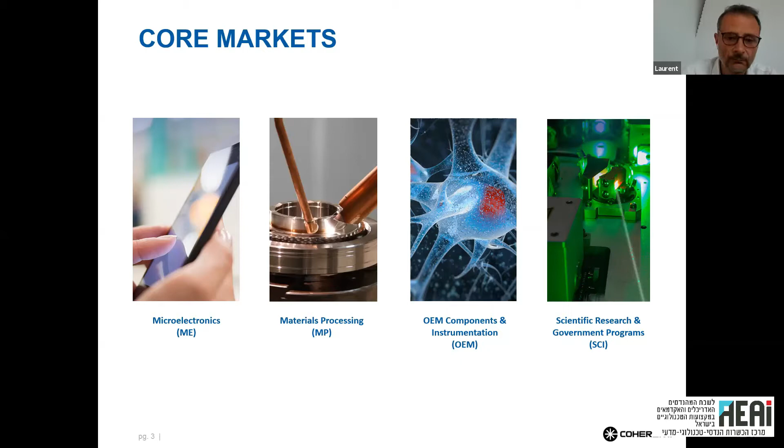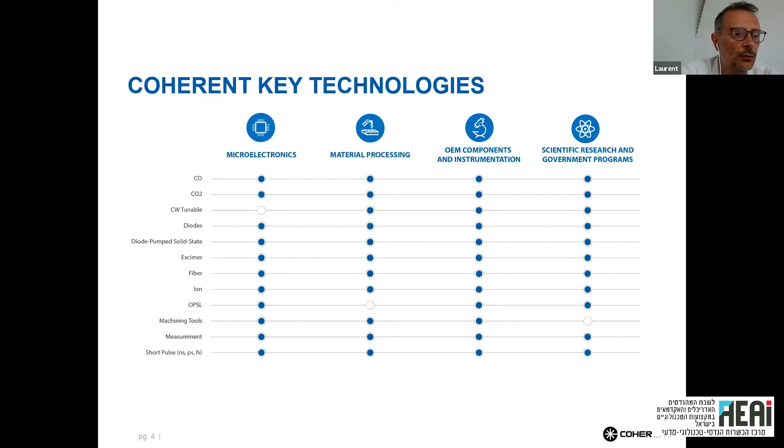So just to give you an idea about all the lasers we are able to supply, it's quite huge, a very wide laser portfolio, from very standard lasers to specific products. We have more or less all the wavelengths, levels of power, pulse widths, and beam profiles you can expect from the laser business. It's also important that we provide not only lasers but systems, meaning machines, and also subsystems. So if you want to build your own machine, we are able to provide you the laser plus some accessories around it.

Our global organization is more or less all around the world, but in every country you will find the same structure: salespeople and service people. We are in the automotive industry, for example, so we need to provide support to all these big groups. In order to have a good response time, we always have service guys ready to go to each customer to repair lasers in case of problems. In Israel, for example, we have a team of more or less 10 people with sales and service.

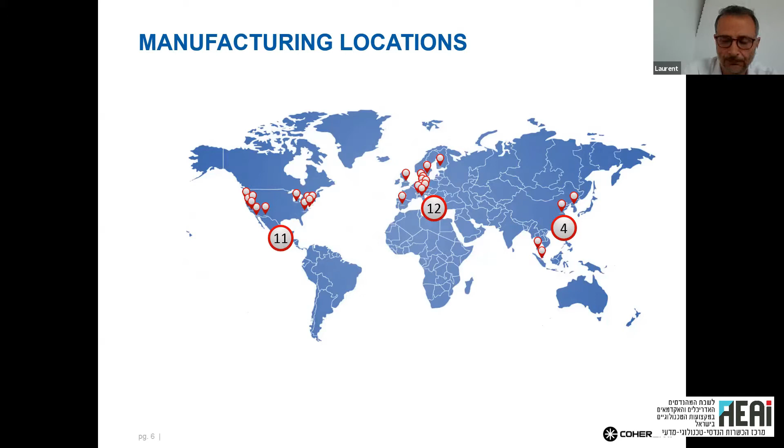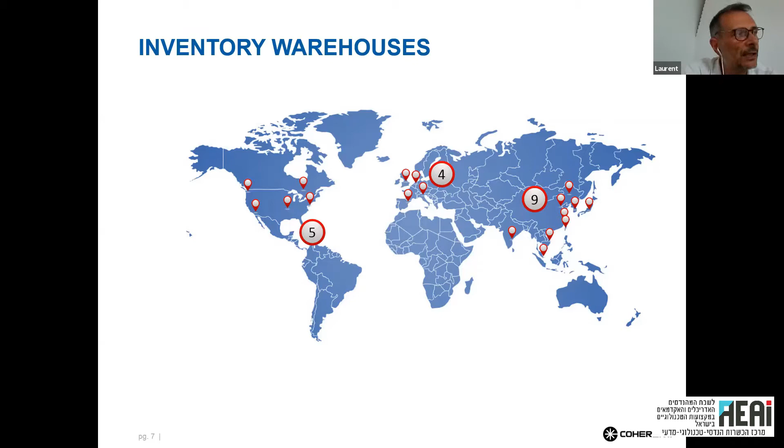We produce in 27 locations, mainly in America and Europe, and a little bit in Asia. In order to have a quick response time for our customers, we also have depot repair. This means we have some lasers ready to be used or exchanged, and we also have spare parts. So if your laser is in trouble, we are able to call on these depot repairs and get the parts in a very short time.

To sell our lasers, we need to help our customers and advise them about what we can do with our laser. For this, we have application centers and laboratories in America, Europe, and Asia with all the lasers, and we are able to support you regarding your assembly. We are able to advise you on what to do and give you the best configuration.

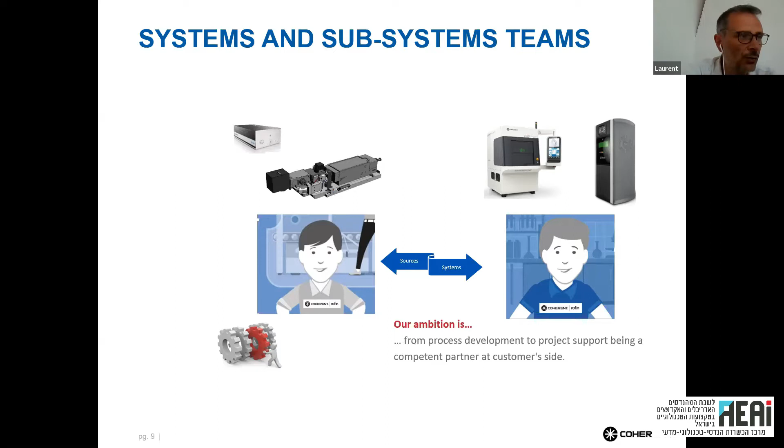As I said, if you look on the right side, we are able to provide some machines, from simple machines to 3D printing machines, for example. But we are also able to focus only on the laser, from nanosecond laser to femto laser, for example, and also high power fiber laser for the automotive industry, for example.

So now, this is the main topic of this discussion. I would like to give you some information about this new product, the SmartWeld+. It's an innovative head, and with this presentation, I would like to show you how it works.

Coming back a little bit to the basics, I'll give you some inputs about why we created this SmartWeld+, around all the knowledge of our engineers. And of course, and it's probably the best for you, I would like to give you some examples about what you can do with this head.

If we go back a little bit to the theory of laser welding, around the process you have a lot of parameters, and all of these parameters can be very different from one assembly to another. As you have seen in the first slides, we have a very huge laser portfolio. So it's difficult to say, okay, for this application or for this type of assembly, we need to use this laser. We need to check a little bit more and understand what could be the best configuration.

As I said, we have lasers with different kinds of wavelengths, so it could be infrared, but it could also be green, or sometimes UV laser. We can work in CW mode, continuous wave, or we can work also in pulse mode. The beam profile of a laser is also very important. So all of these parameters are of course important, but the idea is not to adapt your parts to the laser. It's really the opposite, and this is how we work at Coherent. The idea is to have the possibility to adapt all our components to your product.

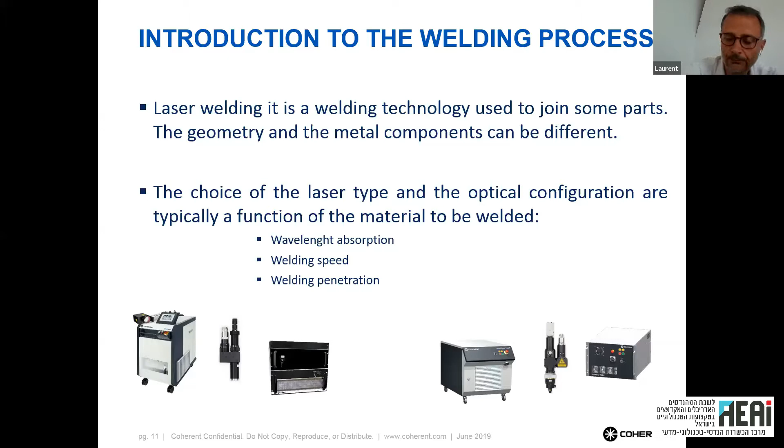If we look at the butt joint configuration, what you are looking for is the width of the weld. If you weld with very good conditions, very perfect, if you don't have any gap, of course it's not necessary to have a very wide seam.

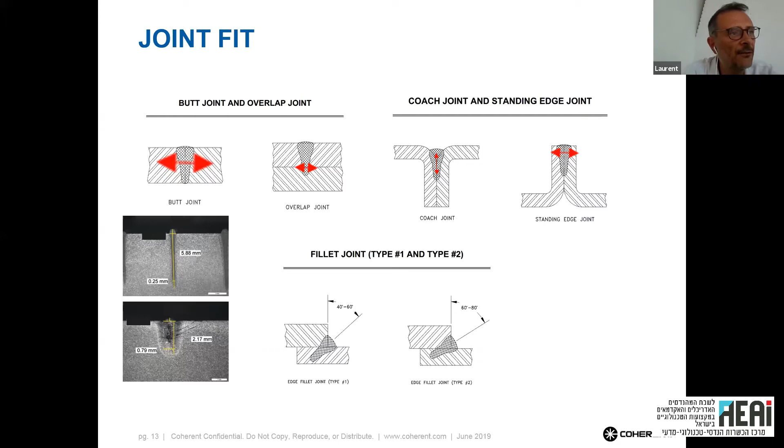If you have a very small spot size and a lot of power, it's easy to understand that the penetration will in any case be higher. If you have a big spot size with some power, of course you can imagine that the penetration will be lower, but the seam will be wider. But again, what is really important to understand is what is really necessary. If we go now to the right side for the edge joint configuration, it's the same.

Two edge joint, according to the spot size we put on the edge, we can create this ball - it could be very narrow or wider. This kind of pins are used today in the automotive industry for electrical engines, for example, two wires side by side, and the idea is to create the ball on top to do the link.

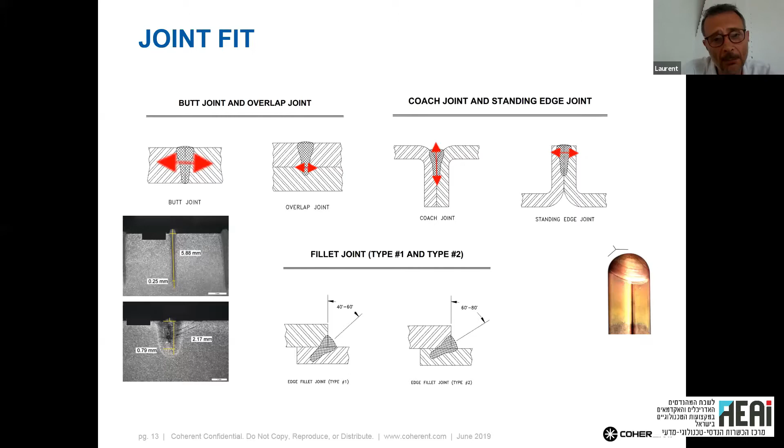Same for the coach joint, in this case the penetration will be important. We don't need to be really wide, but the penetration looks very important. All of these parameters, we can help you define what the size of the seam will be, but we need to define exactly what you need, and according to your set of specifications, we will adapt the beam to this weld.

Just to give a little more understanding about the spot size, I put some pictures on top - it's only a sketch, but very narrow weld, we can imagine that's a green focus beam for example, and the blue is the wider seam. In all of these pictures, the power is exactly the same, the speed is exactly the same, the focal length is exactly the same. The only difference is the spot size.

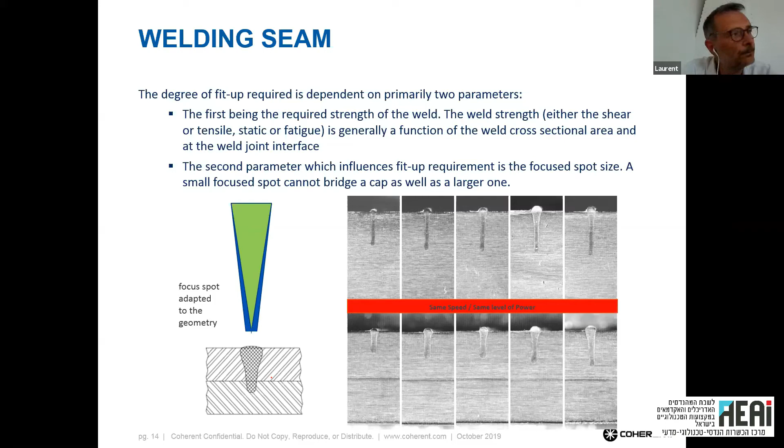So you can easily imagine that according to your project, according to the length at the interface you need, if we don't do the right configuration in terms of focus or spot size, it will not be possible to work in good condition when the part is welded. So the spot size is very important.

Of course, all of these small sketches are close to theory - it is theory. But unfortunately we usually have a mismatch between the theory and the reality. From real parts we can have some gap, we can have different kinds of materials, and we can also have some chamfers sometimes. So we need to compensate for all of this gap with, again, the spot size.

But it's not so easy, because if you increase the spot size too much, this will involve other problems. You will increase the molten material, and if you have too much molten material, you can get oxidation inside, you can create porosity. The heat affected zone will be higher because you put too much energy inside the part, so the heat will increase around the weld. So we really need to adapt and find a solution - just increasing the spot size will definitely not be enough.

Another thing to mention is when the spot is really too big, this generates a lot of splatter, and splatter is really a nightmare - small balls all around your parts. For medical parts, or for a specific area, it will be very difficult sometimes to clean the parts. So if we find a way to weld in good condition without just increasing the spot size, it will be very helpful.

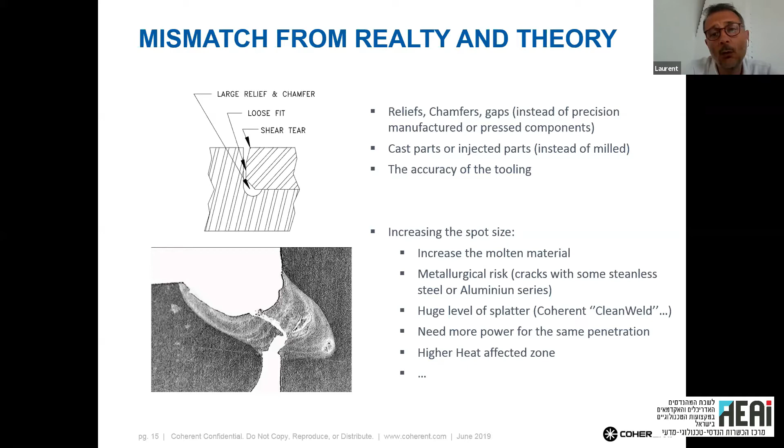And of course, this is what we try to do with the smart weld. We introduced this smart weld, but again, in terms of innovation, this head is really based on our knowledge - our knowledge from the past is a welding head, but with fixed optics, no scanner.

In a lot of configurations we are using scanners from different kinds of suppliers - we are not making our own scanner. But for this head, we decided a few years ago to mix a scanning head with a fixed optic.

And what is really important with a classic fixed welding head is the possibility to keep the beam quality. If you're able to keep the beam quality from the laser on your part, this will definitely help you weld in good condition and increase the quality of the weld. So this head is really a mixture between a classic head and a scanner.

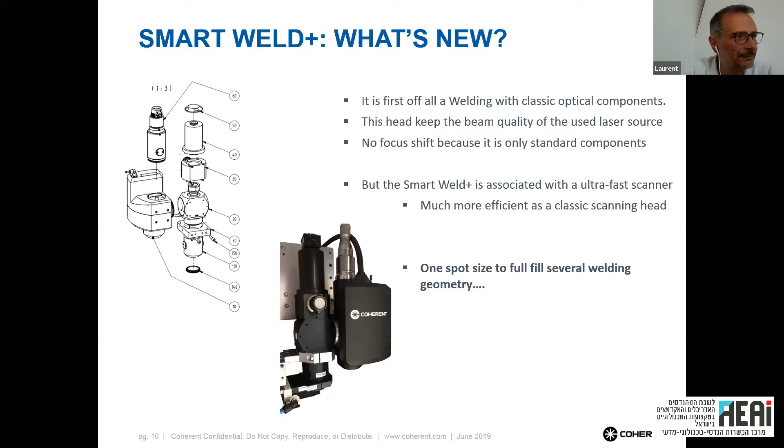Coming back again to the theory, just to give you some explanation about how it works. To focus a laser beam, we have a few possibilities.

It could be like on the left with a parabolic mirror. Honestly, it was mainly used in the past with CO2 laser. Today, we are using lenses. Lenses are probably 99% of what people are using today on industrial application.

The scanning head on our SmartWeld Plus is placed just on top of the lens, so the mirrors to move the beam are just on top of the lens. When I move my beam on top, this creates a very small deviation after the lens. It's not really big, not like a conventional scanning head with a big working field. Here it's really only a few millimeters, no more.

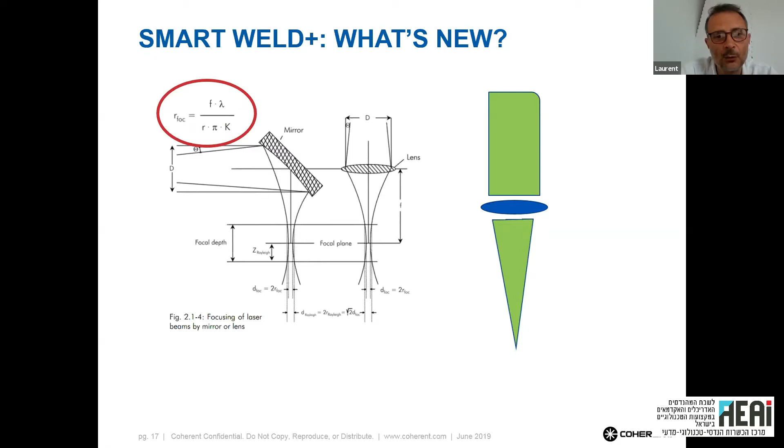And with this head, I would like to focus on this calculation. I don't want to do mathematics this afternoon, but just to give you an idea about why we made this head. If you look at this calculation, some parameters are completely fixed. The wavelength, for example, is fixed. The diameter of the lens, we try to have the maximum, so it's more or less fixed too. The focal length is also fixed. Pi, as far as I know, has been the same for a long time.

And the K factor—the K factor is probably the variable in this case, because the K factor is the beam quality. If you go through a lens or through mirrors, you decrease this K factor. This means that from the exit of a laser to your parts, if you have multiple mirrors, you will decrease this K factor. This K factor should always be between 0 and 1. If you are close to 1, the K factor is very good. If you decrease the K factor toward 0, you can easily understand by this calculation that the spot size will increase—the spot size will be bigger.

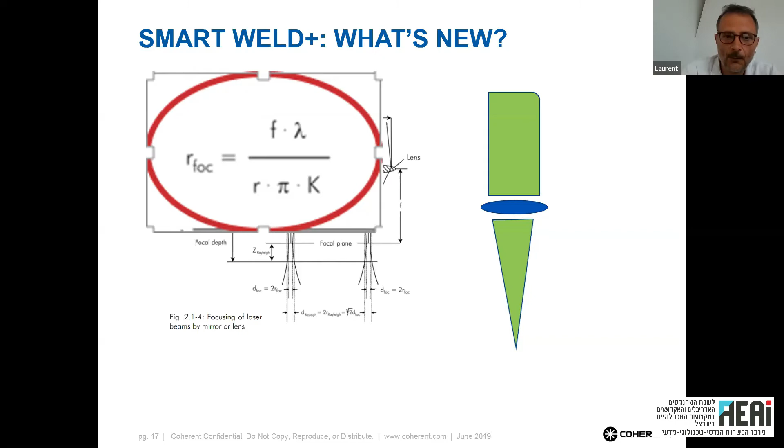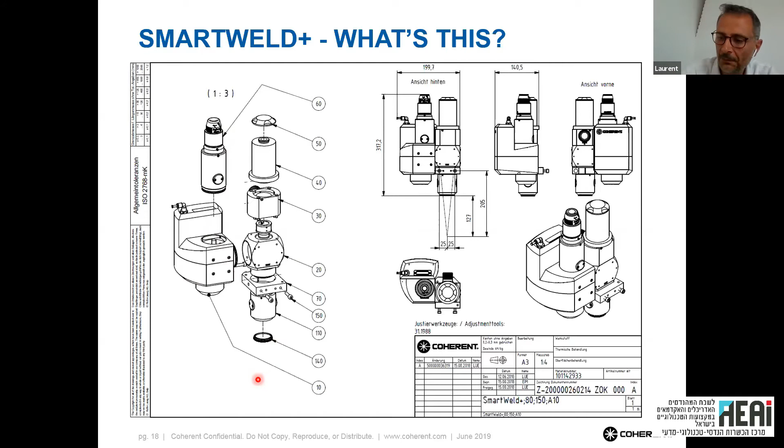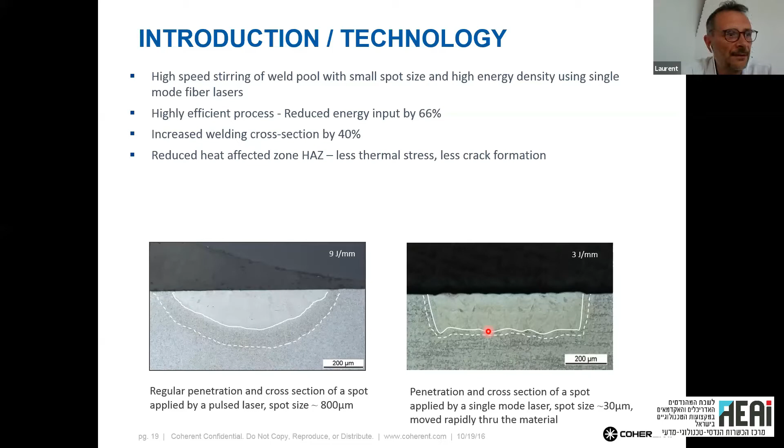The advantage of having a scanner inside the head is the possibility to create specific patterns. The idea is not to go from right to left, we also have the possibility to create some very specific shapes. And this definitely helps because all materials react differently. When you weld aluminum, for example, or copper, or stainless steel, sometimes it's better to have a very, very specific pattern.

In this case, we need a little bit of imagination. Today in the head, we have 15 patterns stored. We also have the possibility, according to the pattern, to follow the contour, for example. So if you have a cross, for example, or also this Mickey Mouse shape, it's not on the picture, it will be later.

You are also able to really track the seam and put the right orientation on the pattern in order to be always in the same position compared to the edge.

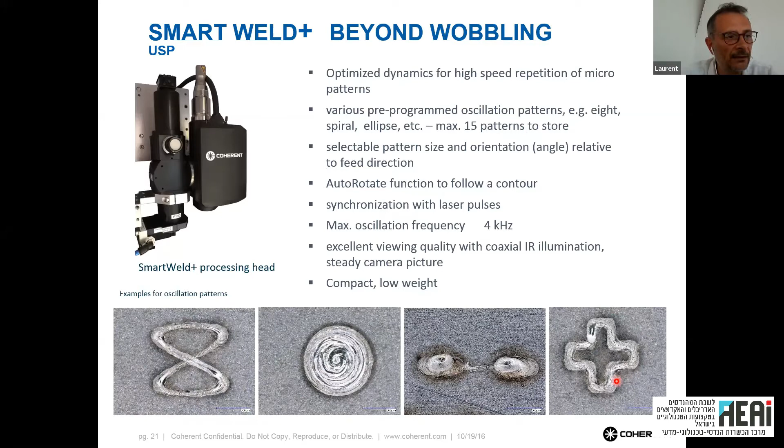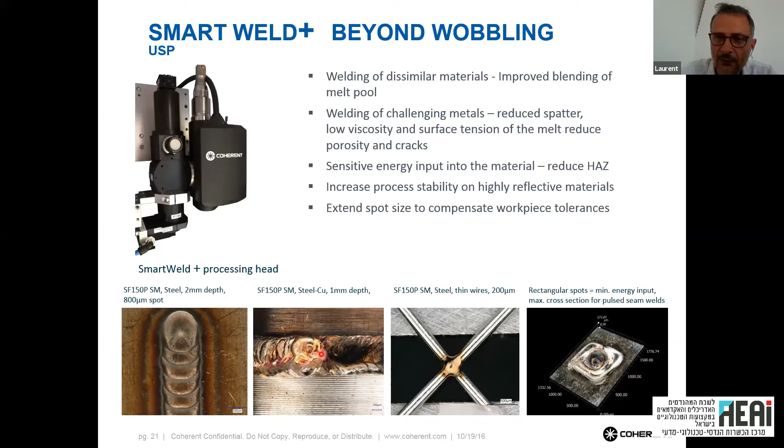So on the left, you have an idea about what we realize with the beam we saw in the last pictures. I have much more examples to show you just after, but what I'd like to show you here is the different patterns and how fast they run. Of course here it's in slow motion, but this is what you have. The beam is moving like this, and part of the welding head is also moving at the same time.

The spot size we see here is 30 micron, and we realize some specific shape. To give you an idea about what we're able to do, this pattern is used to weld some specific stainless steel with a coating on top. It could be zinc, for example, only a few microns of zinc. It's very helpful because these two circles in front of the big one help to vaporize the zinc, and you're really able to weld with this bigger ring. So it's just a tricky thing, but in the end, it works really, really perfectly.

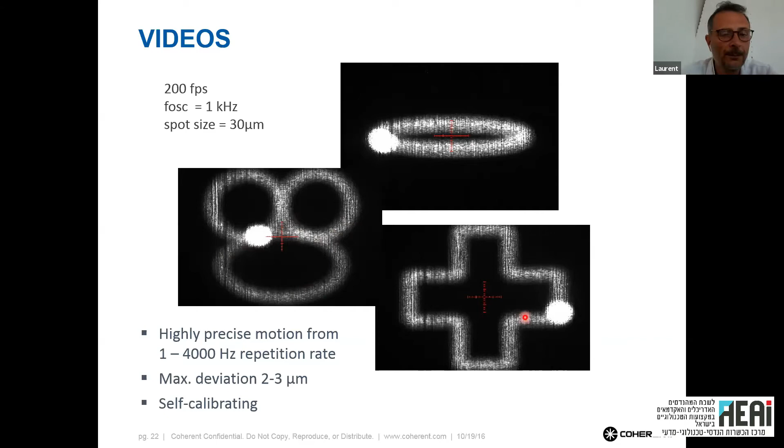Okay, so now these are all my examples.

Regarding the wires, this is also the advantage of this head: I can use it in continuous mode, but I can also use the laser in pulse mode, for example. It can help - it was the case here. We use a laser with 85 watt peak power, maximum. As you can see, the wire diameter was around 200 microns. Again, I have more or less the same spot size for all my applications, so I'm around 30 microns. I'm moving my beam on the wires only, and I'm really able to create a nice weld, protected by gas - that's why it's so shiny.

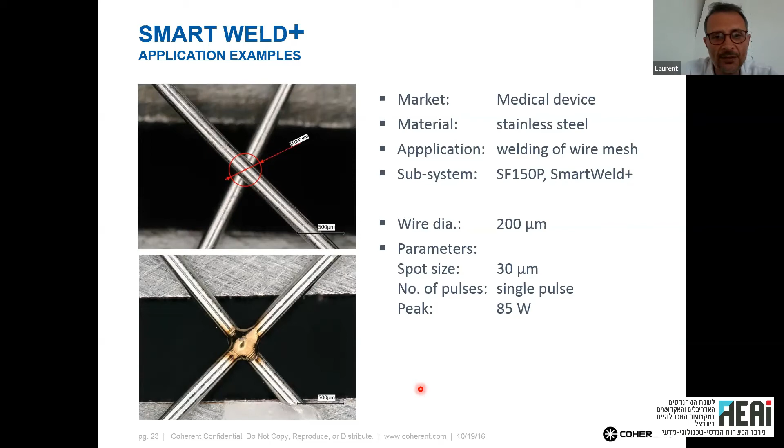But this is a good example of, with one pattern, the possibility with again a very, very good beam quality and a very small spot size, 30 micron. This is what we are able to do.

Difficult to see on this picture, so I hope you'll trust me - it's a weld, but with 4 layers. Difficult to see here, but you have one layer here, another one here, here, and here. All of them 500 microns. And so, of course in this case, you should imagine a clamping device to clamp all the layers, to be sure that we will not have any gap. But this gives you an idea about what we are able to do.

Again, 30 micron spot size. In this case, you can see we are using a pattern - it's like, not a snake, but a pattern with a lot of circles side by side. The advantage of this is to help vaporization of the melting pool, and you can weld with absolutely no porosity inside the welding seam. This is really an advantage.

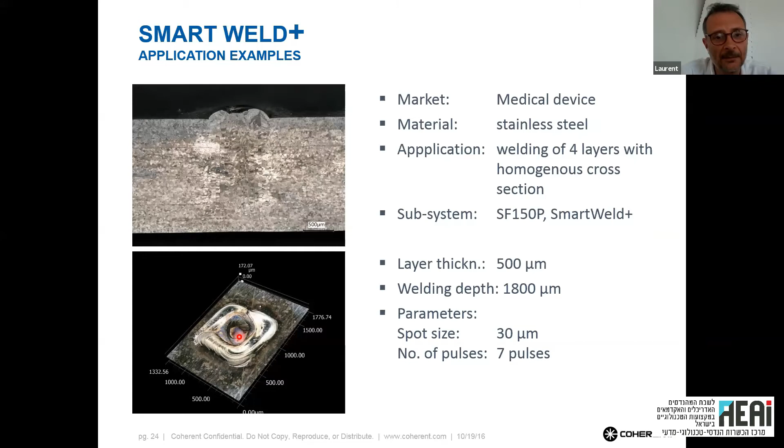Because I have a very small spot size, 30 micron, I'm also able to really manage the power on my melting pool, specifically when I have dissimilar materials. In this case, we have copper on one side and aluminum on the other. Because I'm moving from one side to the other, I'm really able to be very accurate. I'm able to spend more time on one material than the other in order to create a correct melting pool and avoid any porosity or cracks. This is used mainly today in the automotive industry for batteries.

The idea for this application was to be able to weld the battery in 5 seconds. Because of the speed of the head and the possibility to be quite stable in the seam, we achieve 1.5 seconds. Again, the laser was used in pulse mode. The advantage of this laser, the SF150P, is we can switch from continuous to pulse mode. So it's a very flexible laser.

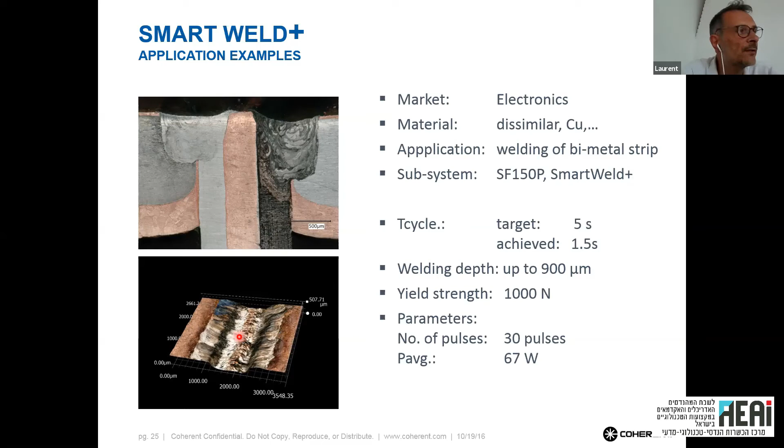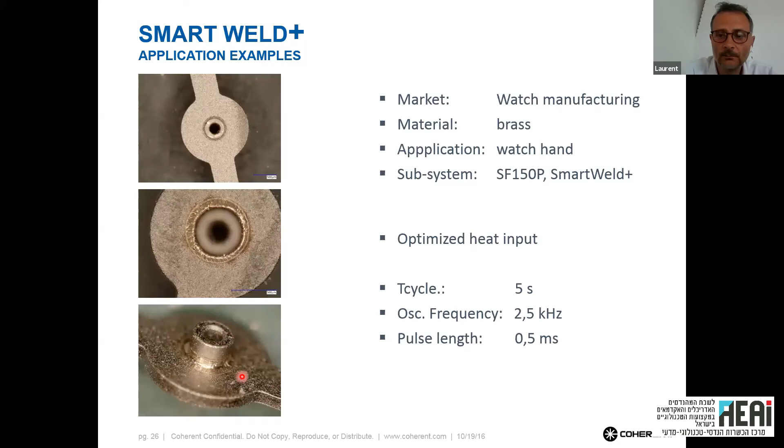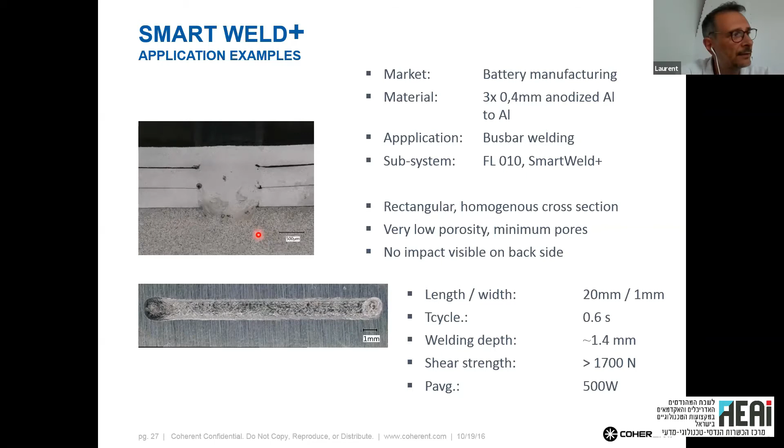In all of these configurations, we are using fiber laser - fiber laser with single mode only. I probably missed this information, but if we want to keep a very good beam quality, it's important to have a good beam quality from the laser. This is the reason why all of these lasers shown in these examples are single mode laser. Even this 1 kilowatt fiber laser is single mode laser.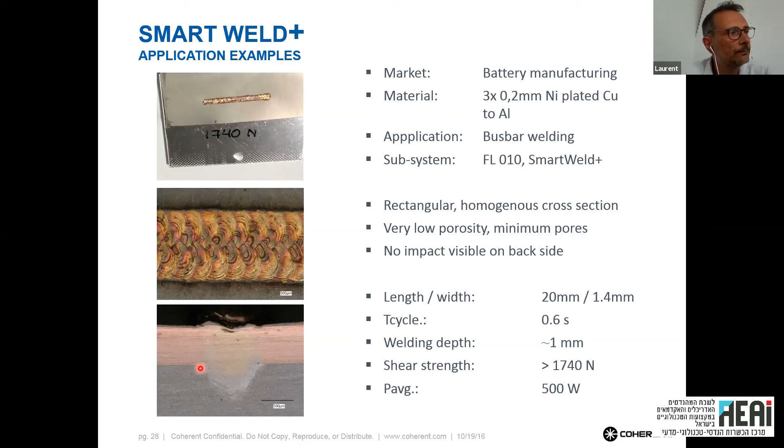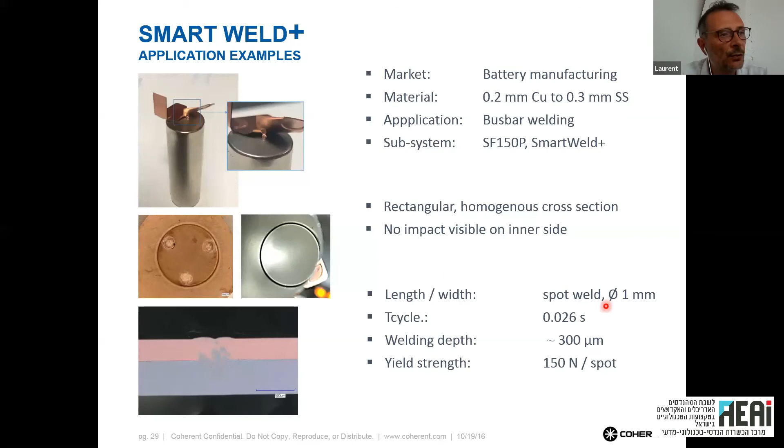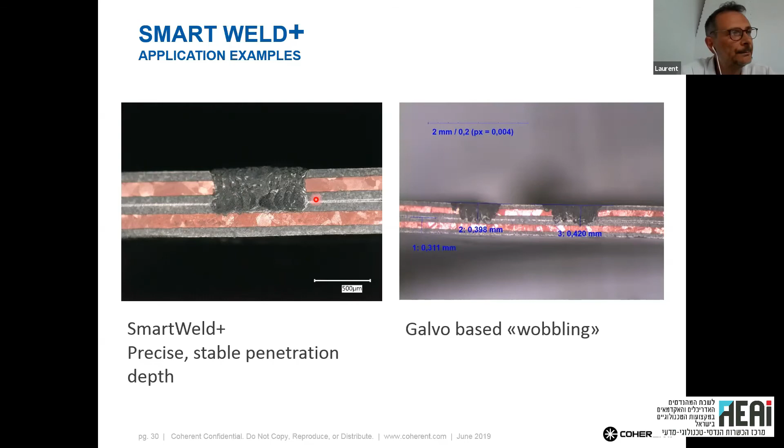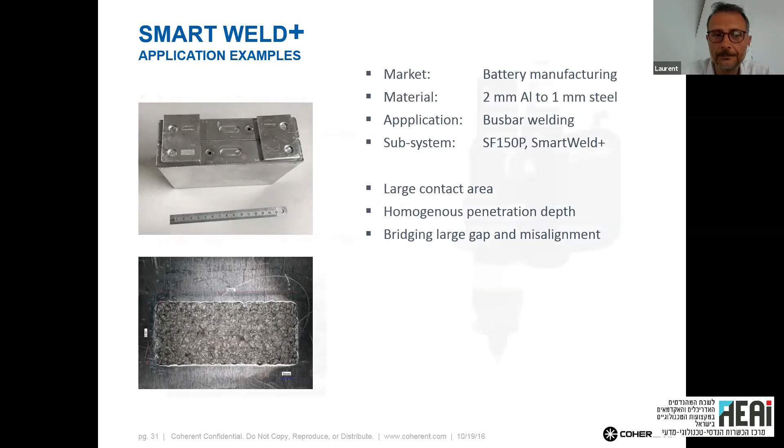In this case, I will show you, I hope it works, the video just after. In this case, we speak about 0.8 millimeter thickness. The laser is 600 watts. The main advantage is we are able to blow some gas at the same time in the nozzle, and this is what we are able to do. So we are able to drill it.

So let's have a look at the video. It was okay, huh? But it's... yes.

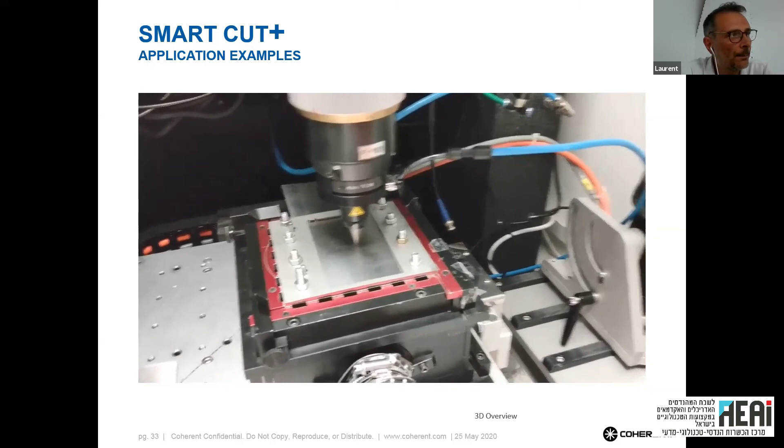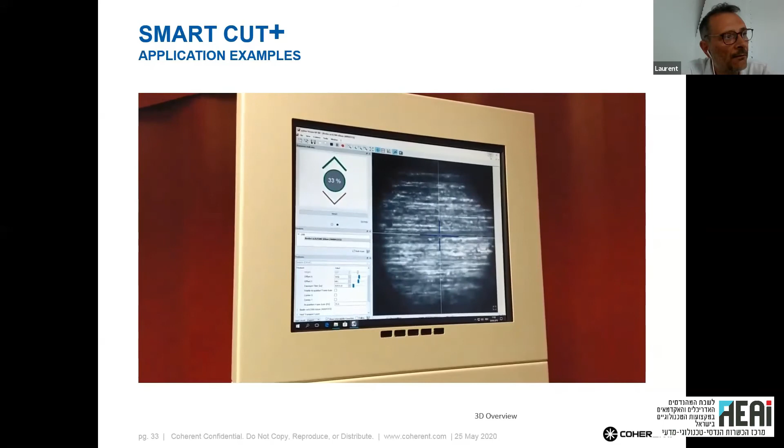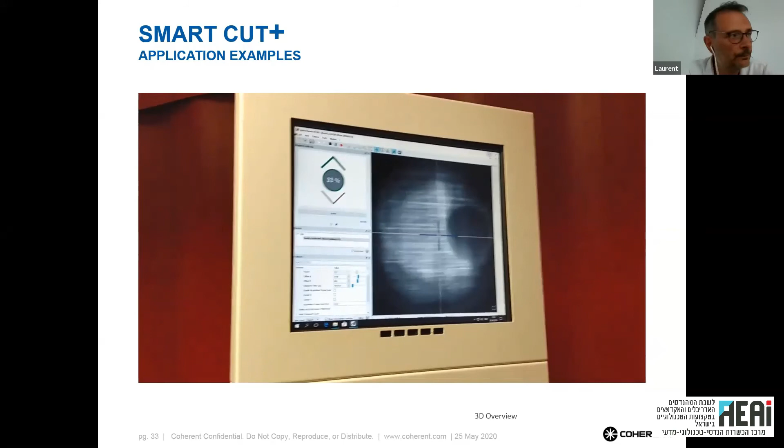As you can see, the process is quite fast. You can imagine, of course, it's easy to understand how fast we go with the head and the cross table. But if you look at the picture here, the white circle is the beam moving inside the nozzle. And at the end, we have very, very nice holes. If I just come back here, this gives you an idea. So this is perfect holes for a microphone, for a mobile, for example.

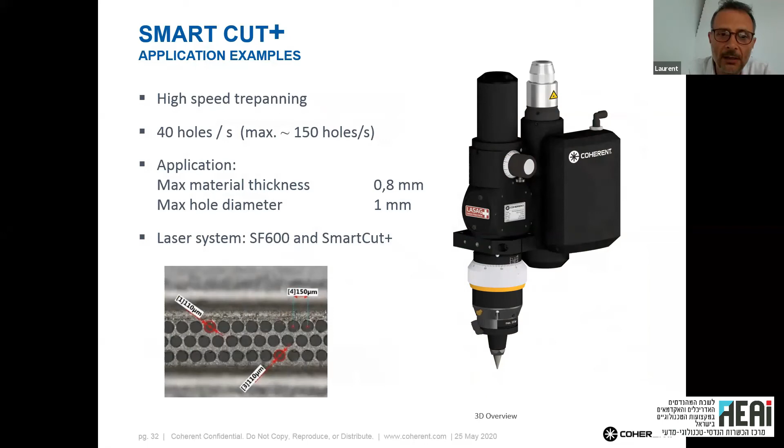As I said, all of these lasers are used, not all of it, no. This SmartWeld Plus is used only with single mode laser. With Coherent, you have the possibility to use some laser from 100 watts to 600 watts, 1 kilowatt also, 2 kilowatt in the next months. So we are on the way to increase the power also on this head.

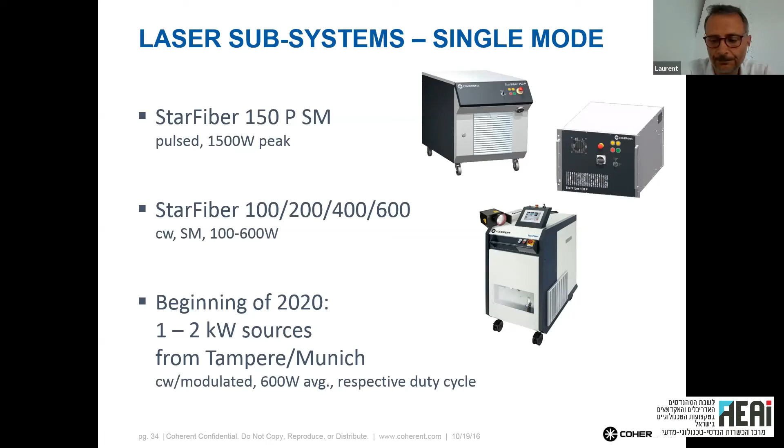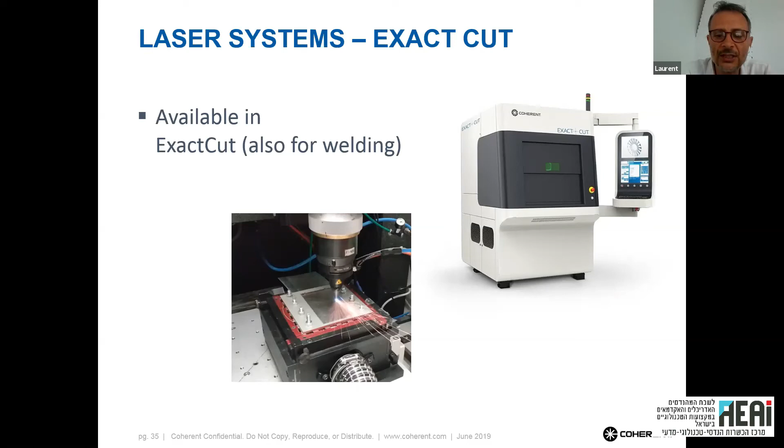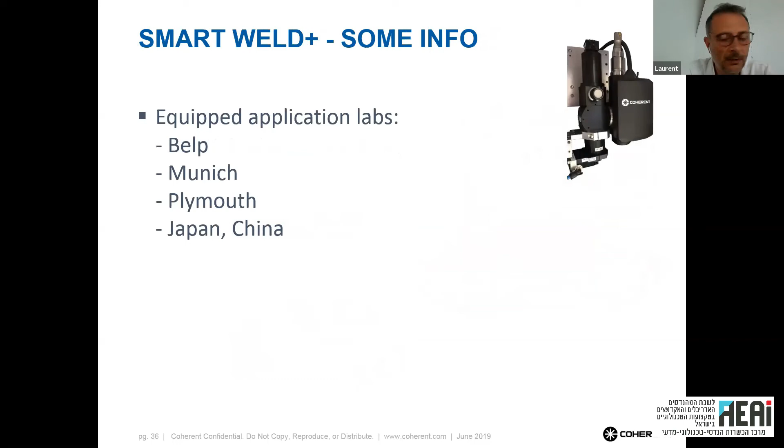For the StarFiber 150 P, we can use also the laser in pulse mode and create 1.5 kilowatt peak power. As I said at the beginning, all of these lasers can be put in machines, or we can supply only the laser and the head, but we are really able to supply turnkey solutions. So you just have to be in front of a machine and load and unload your part. We have different application labs where we can do some tests for you, absolutely no problem, in different countries.

So this is all the features from the head, as I said, single mode, pulse or CW mode. With the scanner, we are really able to control the power and the speed. So we are really able to stabilize the process. For dissimilar material, it's absolutely a good compromise to use this device.

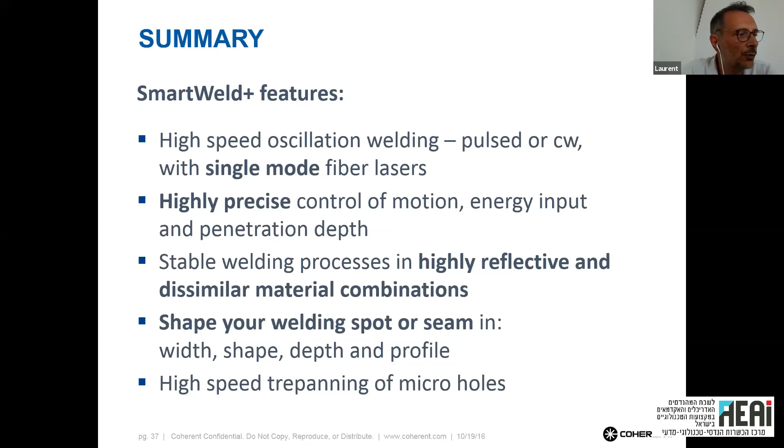And we are, of course, able to create - we have 15 patterns inside the head, but as I said, we just need imagination. So we are able also to create others if you have a specific assembly, and it will probably be necessary to change a little bit the program, but it's very, very easy, and for this, the head is very, very flexible. And as I said, we are also able to drill micro holes quite fast with this technology.

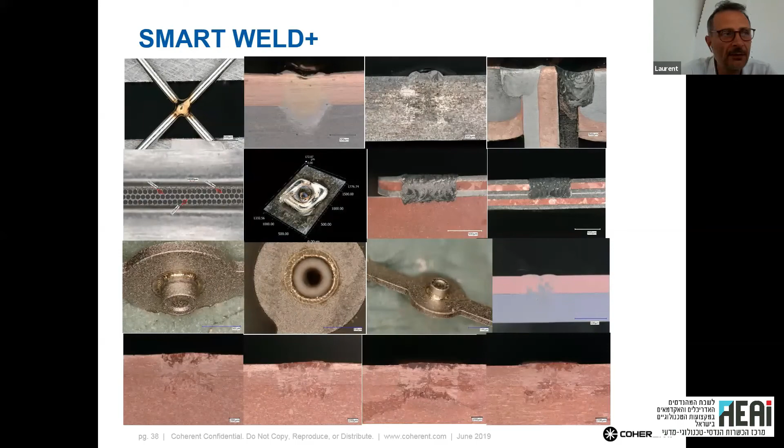So this is all the examples we showed together, we discussed together. I would like to say thank you. So this is the end of my presentation. Again, we are able to give you some advice about specific configuration, specific weld, and we are also able to do some specific tests if you want.

I saw some question.

Yes, you can weld by in CW mode, or you can weld also by spot welding. So I show a lot of cross section, so it's difficult to see the spot welding. So it would be better to have a look on top, but of course it's possible.

So when I talk about a big spot size, what is the dimension? So usually when you weld small parts, I don't want to go with automotive gearbox for example, but small, big spot size is around 100 to 150 microns. In this case, you are really able to weld in good condition. If you have a very perfect assembly, if the edges are really, really nice, absolutely no problem.